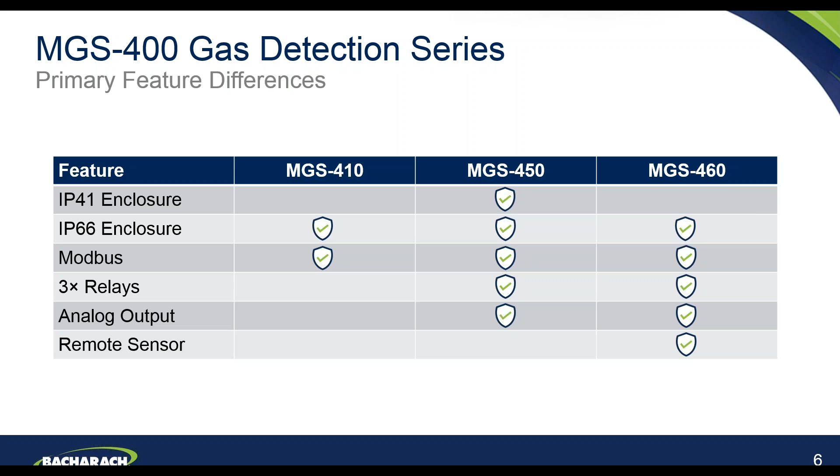As I mentioned earlier, one of the key design considerations for Bacharach when designing the MGS-400 series was how do we differentiate the product in terms of a refrigerant safety solution? How do we differentiate it from what's out there at the moment? And our key targeted customer groups for this product, of course, are refrigeration managers and engineers, facilities managers, refrigeration contractors, and refrigeration installers. As I say, one of the key objectives was to delight and solve some of the key pain points that our target customer groups were facing.

Ultimately, the feedback we had from the market was the customers wanted to save time and save money, make it very simple to use and understand, therefore reducing the training requirements for the engineers. Of course, of key importance is that the product needs to support them in their efforts to comply with the relevant refrigerant safety standards. And in addition to that, the detectors should be suitable for the applications and provide an optimized level of performance in the field.

Okay, so in terms of saving time and saving money as a key pain point for some of our customers, from an installation perspective, the product has been fully designed by engineers for engineers. We spent a lot of time, as I say, on the voice of customer process to identify the key areas of concern for the engineering side. As you'll see as we move through the presentation, the product features multiple cable entries to assist in making that easy and simple. In addition, the 400 series has the capacity to daisy chain power and communications. So again, to simplify the installation process.

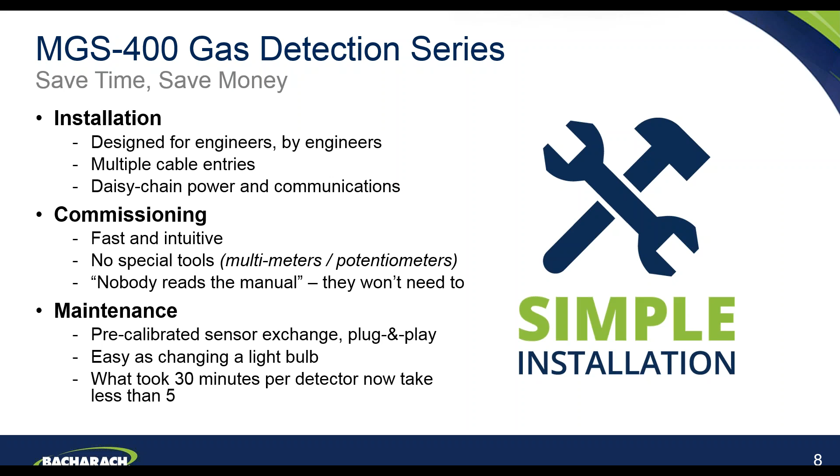From a user interface perspective, we wanted in the design of the 400 series to design it such that it would minimize training requirements and again keep it simple to use and maintain. Therefore, we developed an intuitive smartphone application. As I mentioned earlier, this is available today on both iOS and Android devices. It communicates via Bluetooth to the MGS-400 series detector.

It essentially offers very simple configuration and calibration features. It offers real-time data view of the current status of the sensor and the performance. It offers a test mode, so you can carry out some test functions on the outputs, etc. And it offers some diagnostic information around the sensor life, etc., that we'll go into in some more detail.

In terms of the sensor modules themselves, they've been designed as a poka-yoke design, which essentially means that there is no way those sensor modules can actually be incorrectly installed. You can't put them in upside down or put them in the wrong way round. There is only one way that they can go in. So again, it makes that relatively foolproof and simple to carry out.

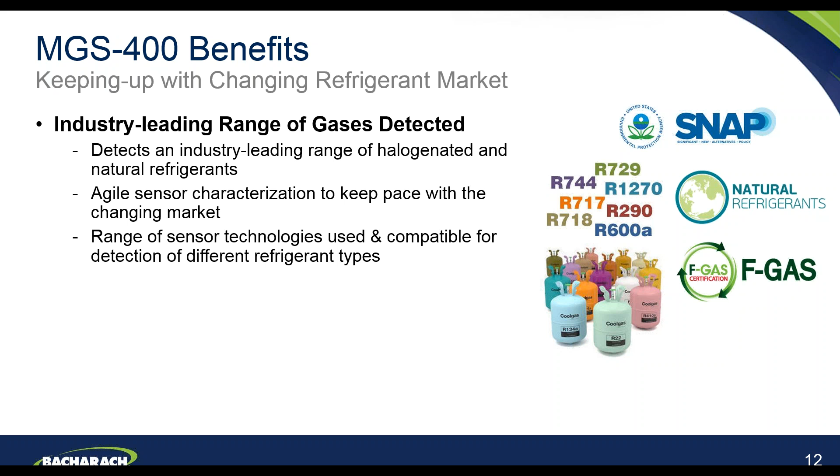We utilize a range of sensor technologies for those refrigerants, using sensors that are compatible for detection of those different types. And in addition, we utilize our own engineering and laboratory facilities to offer sensor characterization. As and when new refrigerants come to the market, we undertake a full laboratory process to add those to our list of available gases that we can detect.

The reason that's particularly important is if a sensor or a detector is not certified for the relevant temperature that it will be installed and utilized in, there are significant drawbacks potentially in terms of the performance of that sensor. Typically that will be in terms of response time, perhaps recovery time, but also in terms of the accuracy of the sensor as well. So I'm very pleased to say that the 400 series is fully certified across the range down to that low temperature point.

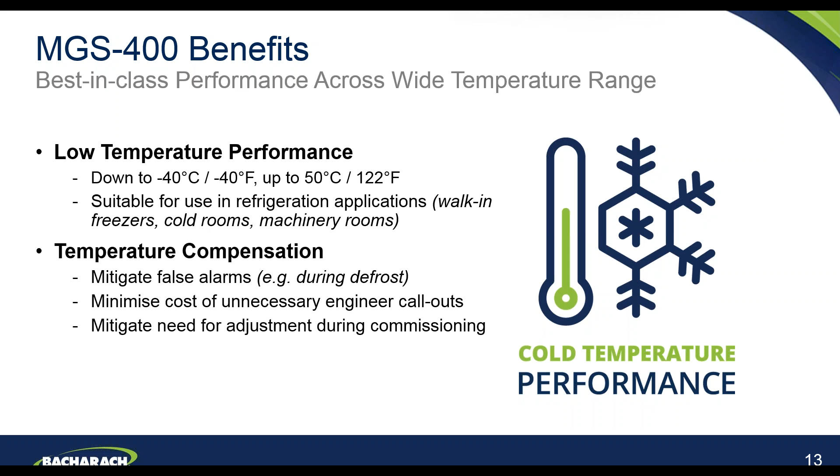The temperature compensation I've mentioned already. What that is designed for really is to mitigate false alarms, particularly during defrost cycles, for example. Minimizes the cost associated with unnecessary engineer callouts. So if you had a false alarm and you called an engineer out, obviously there is a cost associated to that. And it also mitigates the need for some of the adjustments that might be necessary during the commissioning process.

As mentioned a couple of times already today, the key application for the MGS-400 series is to assist in compliance with the relevant standards and codes. In line with that, the product has been designed to feature a number of features that support in that. So, for example, it has tricolor LEDs on both the gas detectors themselves and also on the MGS-408 controller to indicate alarm, power, and fault status. It has inbuilt audible alarms, again on both the gas detectors and the controller.

On the 450 and the 460 variants, they have 3 alarm relays. So the relays can be used to activate additional countermeasures, such as activation of mechanical ventilation system, or used to connect to external horns and strobes. All of the MGS-400 series detectors offer fully configurable high and low alarm set points. So that's designed to initiate appropriate actions at those alarm set points. And again, they are fully configurable, which enables our customers to set those according to their own site conditions and site requirements.

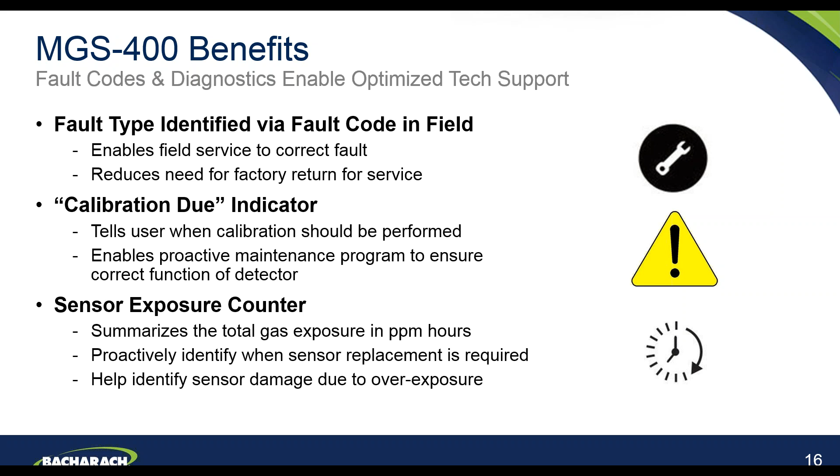Another feature that we have in there is a sensor exposure counter. So what this does is essentially summarize the total gas that sensor has been exposed to in its lifetime in terms of ppm hours. So again, it enables the engineers, the service company, the end user to proactively identify when sensor replacement may be required. And it also helps to identify if a sensor has been damaged due to, for example, a huge overexposure of refrigerant.

From a communications perspective, again, the benefit we wanted to add here was to provide some degree of flexibility for our customers. So all MGS-400 products feature Modbus over RS-485. That enables the detectors to interface with the MGS-408 controller or any third-party BMS system that utilizes Modbus. This also enables us to offer daisy chain communications to make for easy installation of the product. And the Modbus extracts a full set of information from the instruments around the alarm set points, the diagnostic information, sensor information, calibration data, etc.

On the MGS-450 and 460, they both come with an analog output. This can be configured by yourselves and the customers to be 4 to 20 milliamp or voltage. And again, what this enables is simple direct interface with standard control devices in the marketplace.

In addition to the analog output, the 450 and the 460 versions also come with relay outputs. There are 3 relay outputs built into each of those, and that allows for low alarm set point, high alarm, and also fault alarm. And again, this assists our customers to ensure that they can initiate action on alarms such as activation of mechanical ventilation, activation of external horns and strobes, for example.

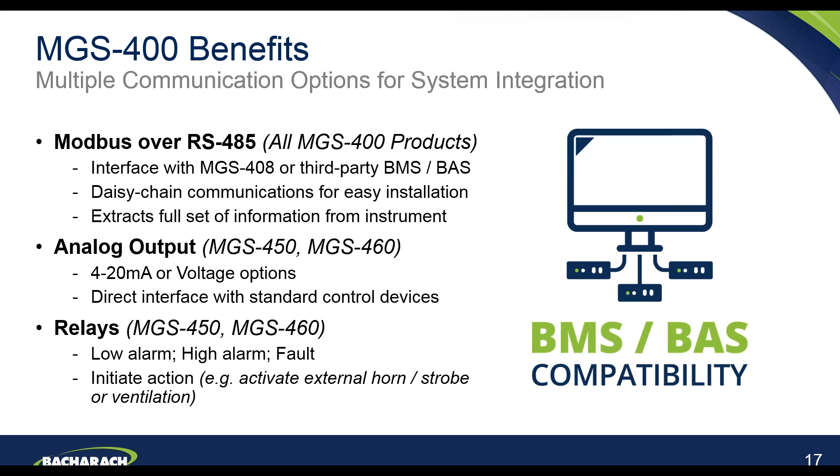As you can see from that, it's a real benefit from an installation perspective because it means there's no crowding of trying to stuff a number of different cables into cable glands. It's very neat from an installation perspective, and it enables that daisy chaining of both the power and the Modbus. In terms of the internal design from a terminals perspective, there are separate in and out terminals for the cable entries. So again, that means there's no need to place multiple wires in a single terminal block, and it's a very neat exercise in terms of that installation.

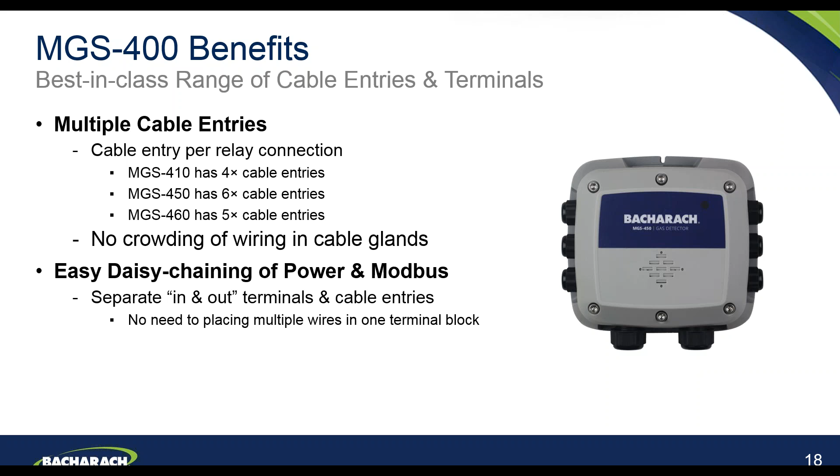Okay, so in addition to the detectors themselves, we offer the 408 gas detection controller. This is designed to be a very simple to understand and operate device for the customers. And it provides a simple at-a-glance visualization of all gas detectors that are connected to the control panel. So the control panel can communicate with up to 8 MGS-400 series gas detectors. It communicates via Modbus, so that also means it has the added benefit that you can interface Bacharach's MGS-250 and also MGS-550 gas detectors into that control panel as well.

The control panel features 3 relays, again to mirror the relay capability of the detectors themselves. So you have a low alarm, a high alarm, and a fault relay. The control panel can also be used as a Modbus slave over RS485. So again, if you prefer, you can have the gas detectors coming into this control panel, and then the control panel communicating and interfacing via Modbus into a third-party control system or a BMS. In addition, the 408 controller incorporates an SD card, which is used for logging events, so faults and alarms.

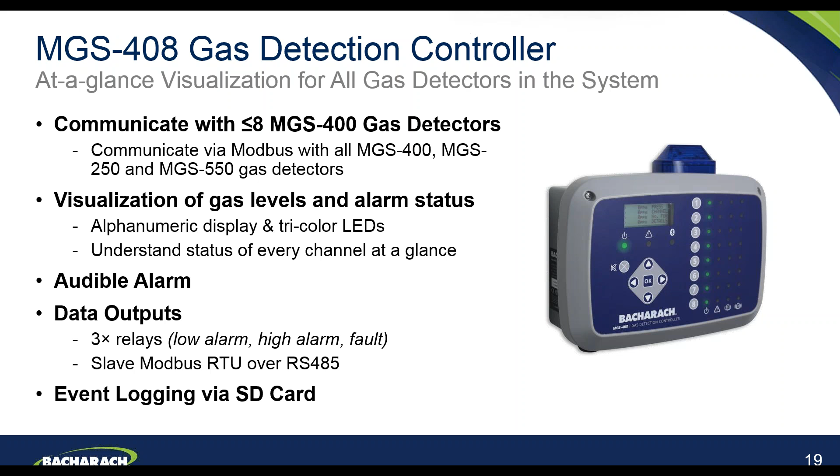Okay, from a user interface perspective, we spent a lot of time to develop the MGS-400 app, which is available on Android and iOS. It connects via Bluetooth to the detectors, and it can be utilized to enable all the configuration features and data extraction. It's an extremely intuitive interface, and there is not any great requirement really for training. It's extremely intuitive to use, and again, this really feeds into trying to address some of those key pain points from engineers and from our customer base in terms of the pain points they see with product that is on the market today.

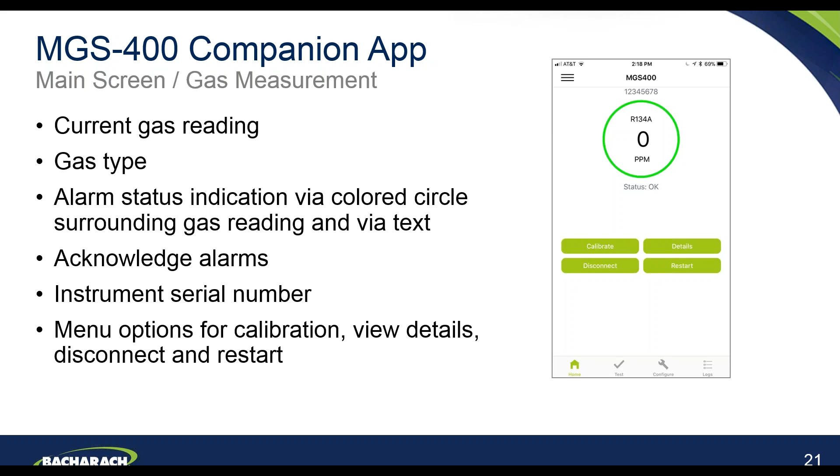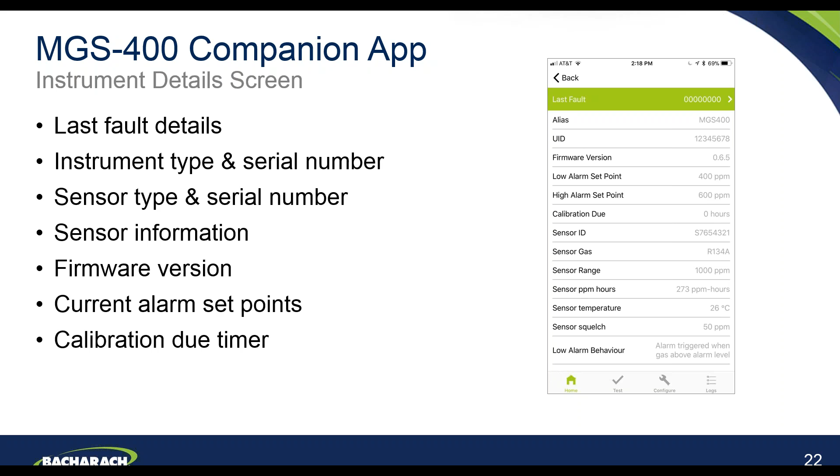Okay, and moving on to the calibration screen. So just as a note on both the calibration and the Bluetooth connectivity, there is a password protection. So it's there really to prevent any unnecessary tampering with the instrument or with the set points of that instrument, the configuration.

Essentially, to initiate a calibration, you attach your cylinder of calibration gas to the detector, you switch that on and you click start span. It will automatically go through that calibration procedure for you, make any necessary adjustments, and it will tell you if the calibration was a success or a failure. So a failure may be if there was some sort of fault with the sensor perhaps.

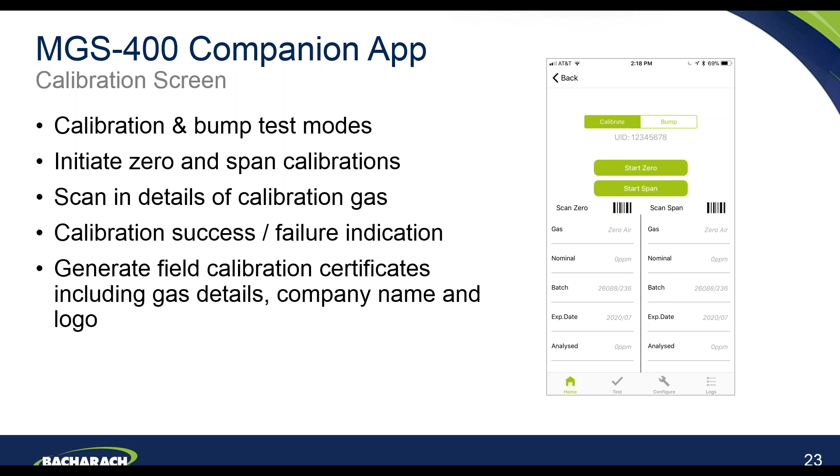The next screen that we'll show you is the test mode screen. So here you can utilize this screen to quickly test the outputs from the MGS-400 detector. So it enables you to manually step through each of those outputs and test them. So you can test the LEDs there. So you can have them either switched off, green, red, orange.

You can test the internal buzzer function. You can test the relay activation. So you can switch the relays on and off, and that will activate any items that are connected to that. You can test the analog outputs, and you can test that across the full range.

This is a great screen and a great feature for both the commissioning phase of the installation and also for fault finding following installation. So as part of the commissioning process, you can utilize this to fully test that all of the relay connections are working correctly, that the alarm outputs are working as you would anticipate them to. And then down the line in the future, if there was some sort of fault potentially with the instrument, you can utilize this to help in fault finding to identify what the actual issue and fault is with the instrument.

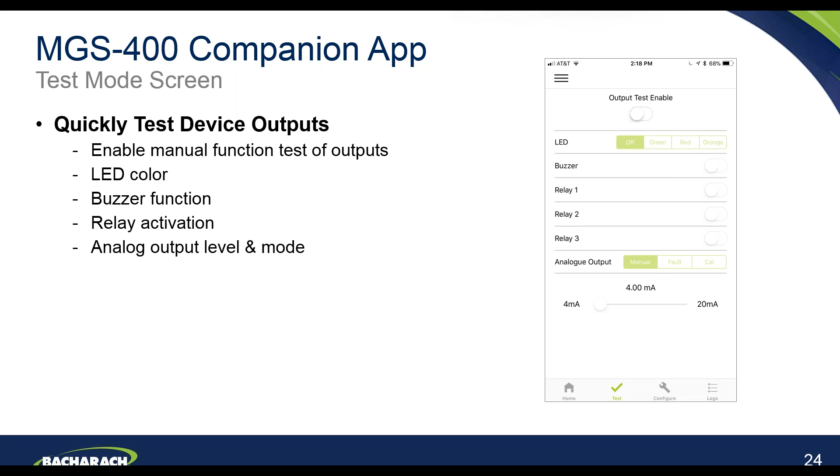In terms of supported gases, I mentioned earlier the investment in resource and capability that Bacharach has around supporting existing refrigerants in the market, but also offering detection solutions that can support new refrigerants as they come to the market. We support a number of different sensor technologies for measurements of the most commonly used ones today.

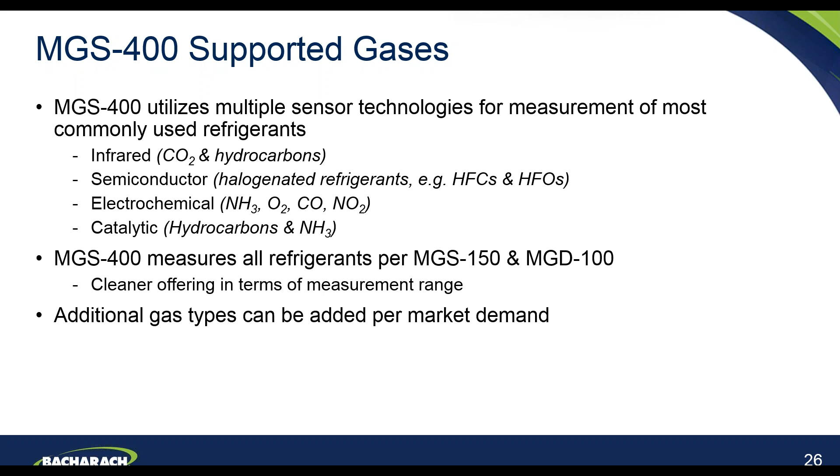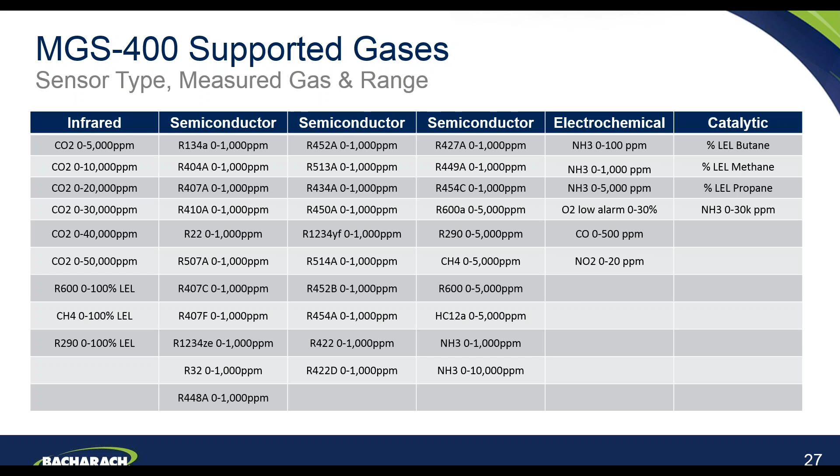We also offer the MGS-250, which is an infrared-based diffusion instrument, and that's really utilized where you have the potential for some gas interference, whether that's different gases on site that will react with a semiconductor, for example, or if there's some strong chemical-based cleaning materials or diesel emissions. The MGS-250 as an infrared sensor will not respond to those, so that may be a more suitable solution.

The 550, which is a dual sensor option. So again, if you have customers who need a single transmitter-based detector with two different sensor variants, the 550 can support that. And then we have the MVR 300, which is our product specifically designed for and targeting the VRF occupied space market.

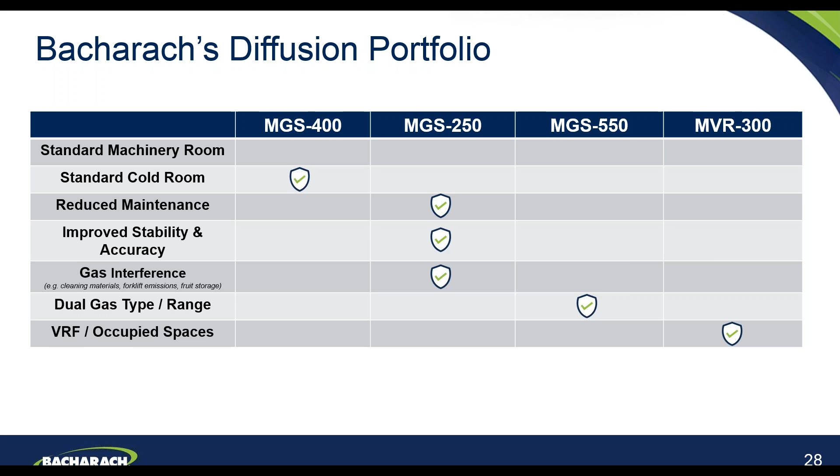Another key comparison and an area to spend a moment on to explain is where does the MGS-400 series differ from the multi-zone. So for those of you who are not maybe aware, the multi-zone is Bacharach's multi-point aspirated detection system. The MGS-400 series forms part of our diffusion portfolio, which is essentially standalone point detectors. The key differential really is the markets and the applications that both of these products are targeted at.

So the MGS-400 is very much targeted and designed to support compliance with refrigerant safety standards. So personnel protection, particularly CO2, for example, in a lot of the supermarket applications. The multi-zone really is designed to support customers who are looking to actively reduce their refrigerant losses. It's a true leak detection system, and it's designed really to support things such as F-gas, reductions in refrigerant losses, the CARB initiative in the US.

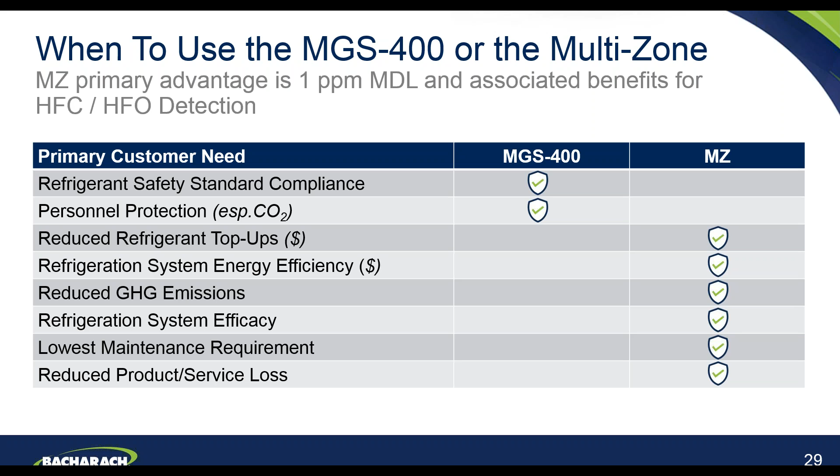And the key differential with that is the capability to measure down to just 1 part per million on the multi-zone. So what that gives you is the capability to really identify at a very early stage relatively small leaks in an environment and tie that into a philosophy of refrigerant management and reduction of refrigerant losses. The MGS-400 series, as I say, is very much targeted and designed to support the compliance market for EN 378, for ASHRAE 15, and to provide personnel protection in the event of a relatively significant leak.

Okay, so in terms of the available sales toolkit, the data sheets for all the product variants are available. They're actually available that you can click and download from this presentation today. The MGS-400 overview sales brochure. There is also a competitor comparison matrix and presentation that we can share on a local and regional level and basis with our channel partners.

There is a separate presentation on application and configuration, and we'll go through a couple of those at the end of this presentation. Just as examples, we have a product configurator in the works, which will help to support customers to identify which specific product they need. We have demo kits, which will be made available to all of our channel partners. And we're keen to support that our channels have sufficient demo instruments to take to customers to show.

The nice thing with the 400 series, it's very much a product that can be demonstrated using the app, etc., using the test functions within the app. It's a nice product to have on a desk and to show customers to really articulate the value and the differentiation between the product and the rest of the market.

We do have some presentations and some support material around the refrigeration safety standards, particularly EN 378 and ASHRAE 15. We do plan in the near future to schedule some specific separate webinars for you guys on this topic, and we can go through each of those in detail, and of course, once we have some dates for those, we will share them accordingly. In addition, we do have a full bid specification for the 400 series, which can be utilized in your efforts to have the product specified within a project.

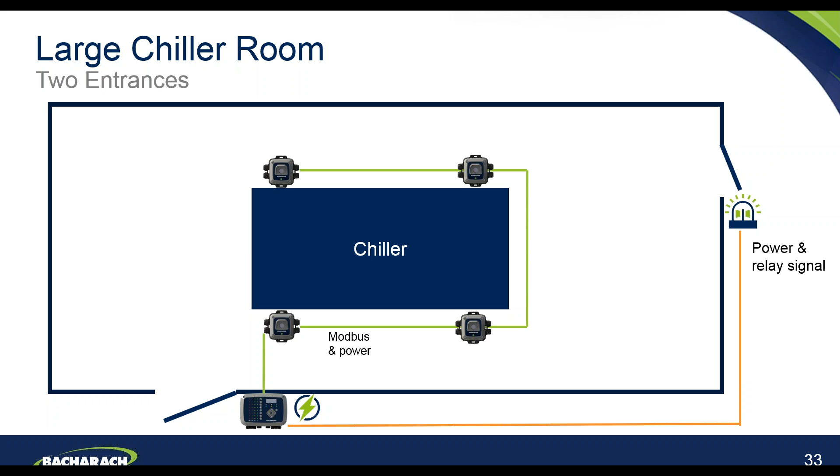You'll notice on the right-hand side here that we also have a second entrance into this particular room. And so from that control panel, we're also using power to drive a second audible and visual notification which sits outside that second entrance to the room.

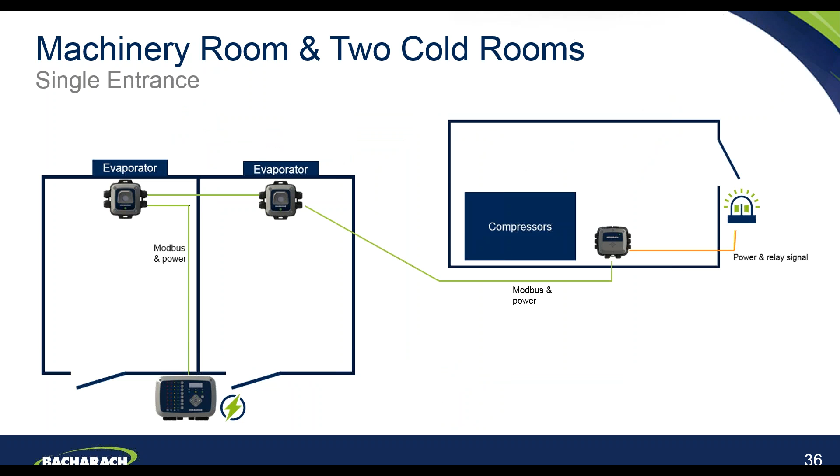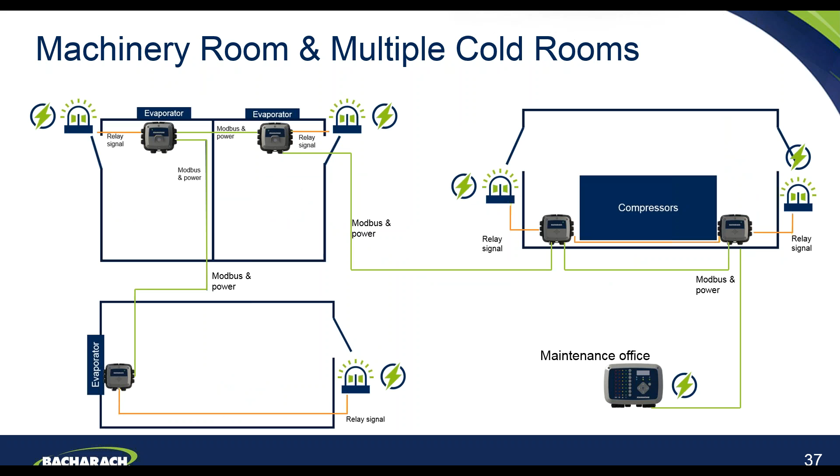If you had additional entrances to those rooms, again, you can drive power and relay signals from the MGS-450s in each of those rooms to drive an additional beacon sounder which sits outside. Okay, and as you'll see, I won't go through the rest in as much detail, but you can see from these diagrams that we've put some thought into some potential scenarios that you may face with customers in the field, and examples of how you can apply the MGS-400 series to support those requirements.

So here we have a large cold storage facility, for example, a number of detectors in a cold room, and also a detector in the machinery room at the top right there. And this particular one is nice because it highlights the daisy chain capability of the detectors connected into a control panel.

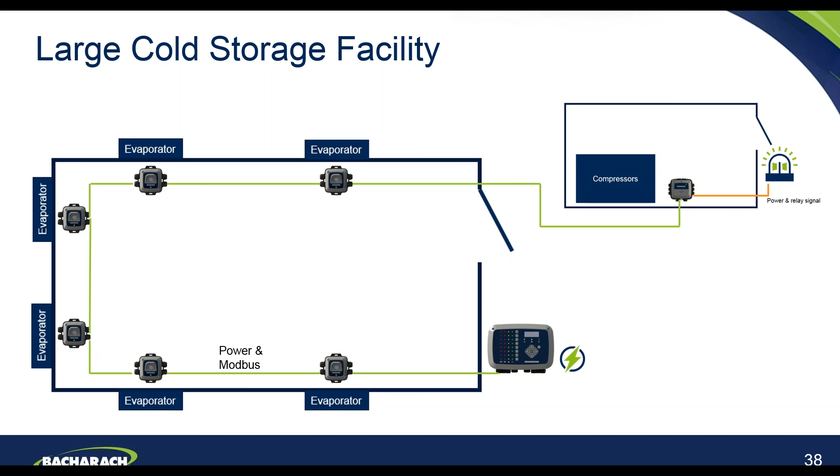I'll hand over to Matt now, who will be picking up on some of the questions that you may have raised during the course of the presentation. All right, thank you, Carl. Again, we're very excited about the MGS-400 product line, and hope you are as well. Obviously, we've had quite a few questions come across during the webinar, and so I want to thank you for those.